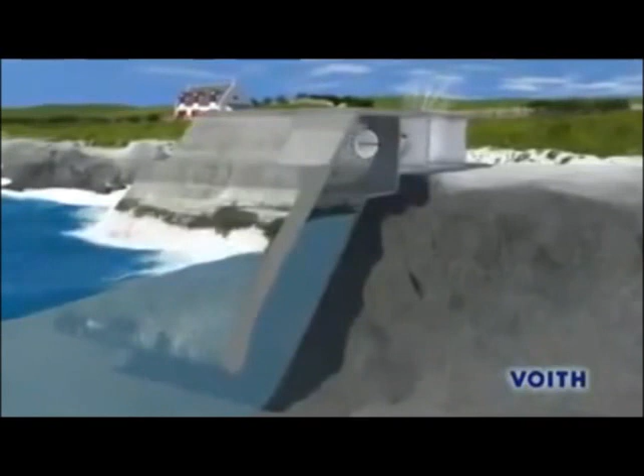The operating principle of this wave power station is as simple as it is ingenious. An enclosed chamber has an opening beneath sea level, which allows water to flow from the sea into the chamber and back. The water level in the chamber rises and falls with the rhythm of the waves, and air is forced forwards and backwards through a turbine connected to an upper opening in the chamber. As it is compressed and decompressed, the airflow has sufficient power to drive the Wells turbine, named after its inventor, which is driven in the same direction by both forward and reverse airflow.

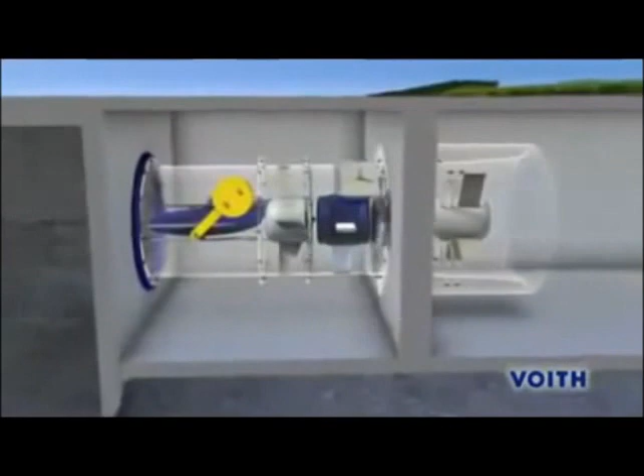Even relatively low wave motions can generate enough airflow to keep the turbine moving and to generate energy. The world's first power station of this kind was put into service as early as November 2000 on the Scottish island of Islay, and has been feeding power to the grid ever since.

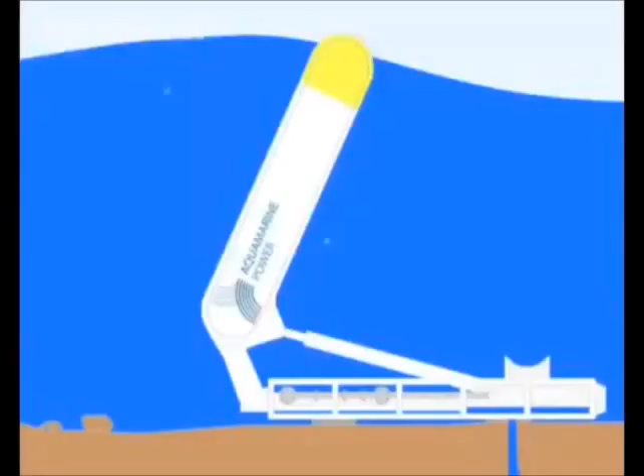Sea creatures are inspiring the latest devices that harness wave power. This one, called the Oyster, sits on the ocean floor and opens and closes as waves pass over it. Cables attach it to generators on the shore. Since November 2009, it's been powering 9,000 homes in the Orkney Islands.

Another device looks like a snake. The Anaconda is made from a rubber tube filled with water that floats just below the surface. When a swell hits the front of it, the tube is squeezed, and a bulge ripples down its length, powering a turbine in its tail. Prototypes are currently being tested, but the full-scale version will be 200 meters long.

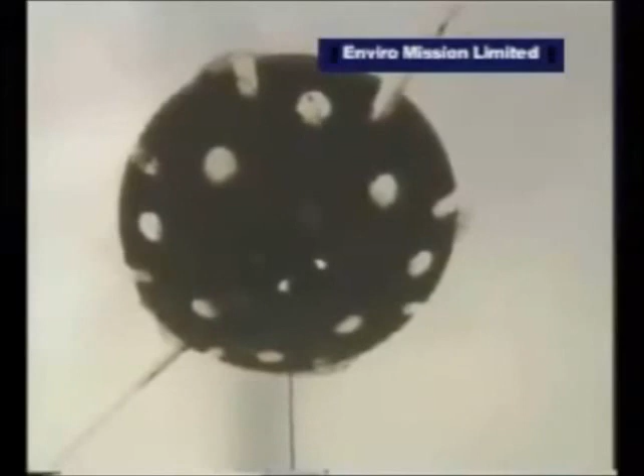Inside of the collector area, you can see 4.4 hectares of plastic material called Tedlar - polyvinyl fluoride - which is held in position by these spreaders, pulled down by this heavy weight. That's to keep everything tight so it can handle the high winds generated, not only by the air flowing through to the chimney, but also in this area generally, where winds can get up to around 150 kilometers an hour.

During the day, the heat builds up here to around 50 degrees centigrade, and the air starts flowing in continually towards the chimney. But the interesting thing is that it also works at night as well as day, and in cloudy and rainy spells, because not only the air but the ground beneath it is heated up during the day to such a degree that at nighttime it re-radiates that heat back again, keeping the air warm and flowing inwards towards the chimney all the time.

Instead of a desert developing underneath this collecting area because of the high temperatures here, they got instead quite luxuriant plant growth underneath because of the greenhouse effect, which produced large quantities of condensation during the night.

This is the funnel, as it's known, and it's not much more really than two curved capes made of a polymer-coated fabric, which gives a smooth transition for the air coming in from the collecting area outside and going up into the chimney above, where you can just see the blades of the turbine turning slowly. Well, it's switched off at the moment because they're making some adjustments.

This solar chimney in Spain has demonstrated that it will be possible in the future to compete on a dollar-for-dollar basis with virtually any other form of power generation, with that one unbeatable advantage: an inexhaustible source of free, original energy in the sun.

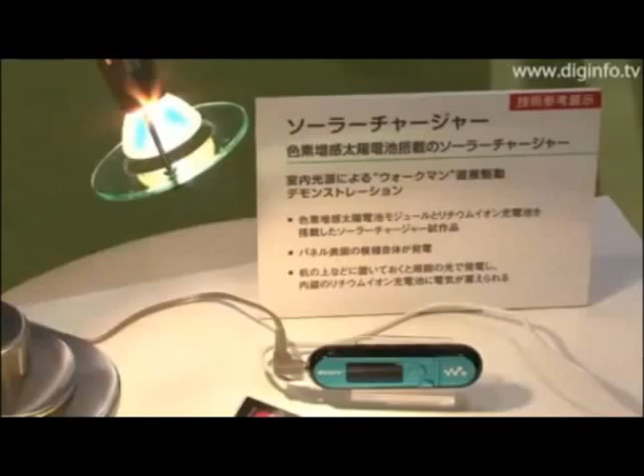As a mobile application, Sony also displayed a solar charger with dye-sensitized solar cells. The pattern on the surface of the panel generates electricity which is stored in a lithium-ion battery. At Eco-Products 2009, Sony used an indoor light source to actually power a Walkman as a demonstration.

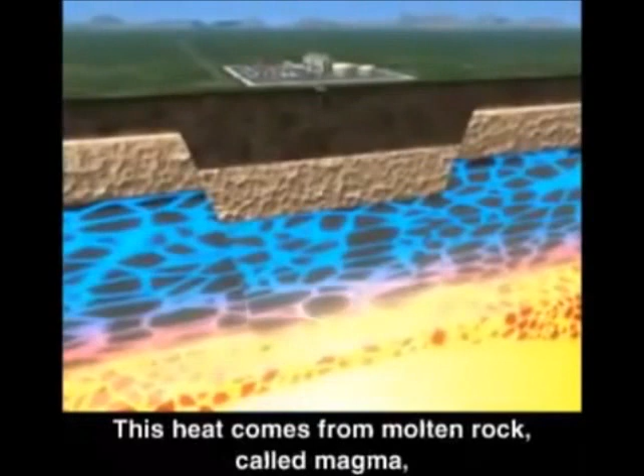The natural heat of the Earth creates geothermal resources. This heat comes from molten rock called magma, located at the Earth's core, deep below the geothermal resource. Over thousands of years, rainwater seeps through cracks in the Earth's surface and collects in underground reservoirs. The magma heats the water until it becomes a superheated fluid.

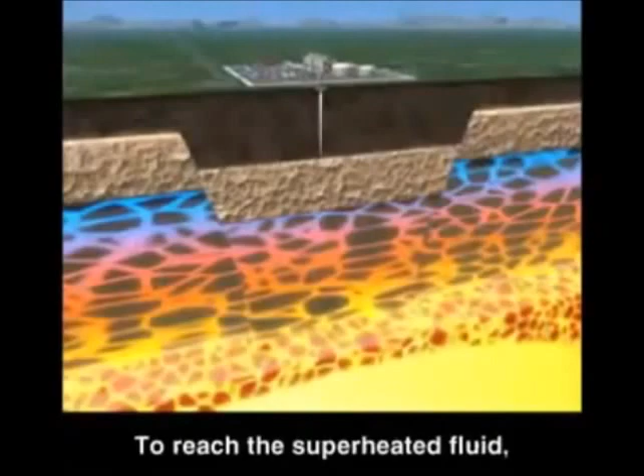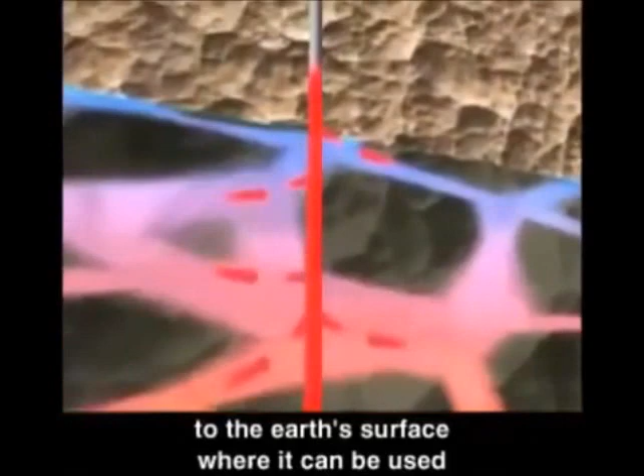To reach the superheated fluid, wells are drilled 5,000 to 10,000 feet below the surface of the Earth. These wells, called production wells, bring the superheated fluid to the Earth's surface, where it can be used to generate electricity for homes and businesses.

Under its own pressure, superheated fluid from the geothermal resource flows naturally to the surface through production wells. As the liquid flows toward the surface, the pressure decreases, causing a small portion of the fluid still within the well to separate or flash into steam.

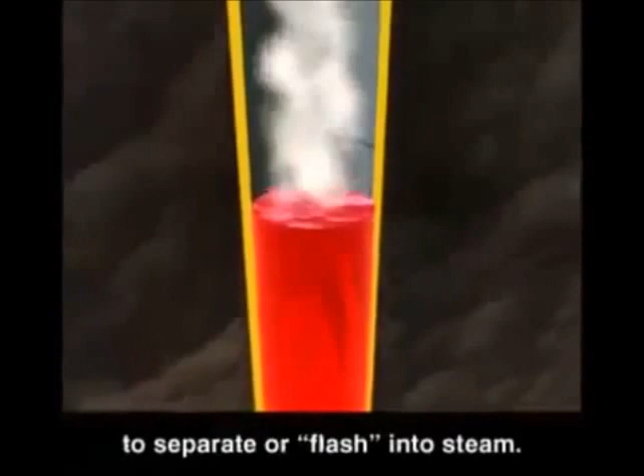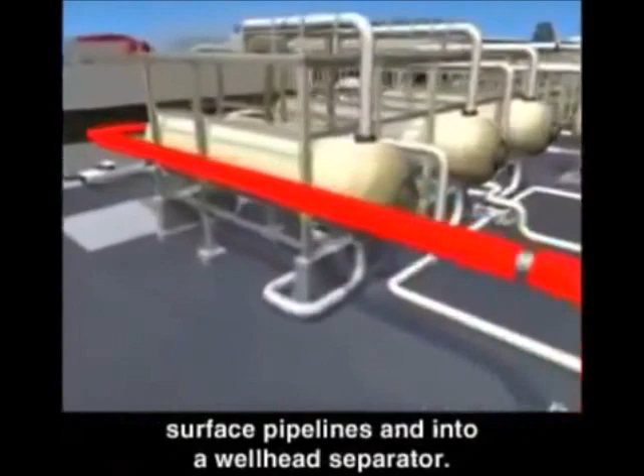At the surface, the superheated fluid and steam mixture flows through surface pipelines and into a wellhead separator. Inside the separator, the pressure of the superheated fluid is reduced. This causes a large amount of the superheated fluid to rapidly vaporize and flash into high-pressure steam.

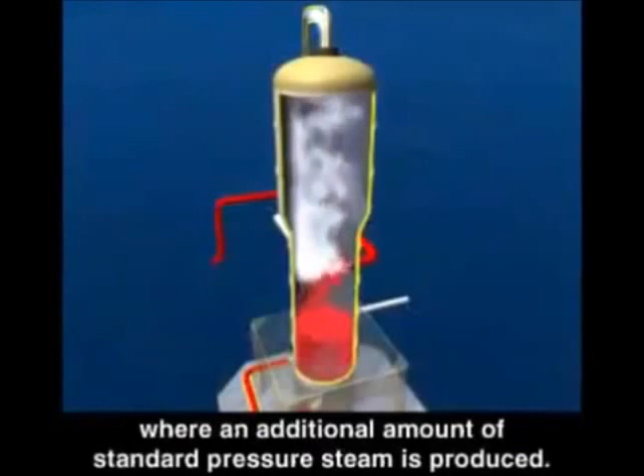The geothermal fluid that is not flashed into steam in the wellhead separator flows to a second vessel called a standard pressure crystallizer, where an additional amount of standard pressure steam is produced.

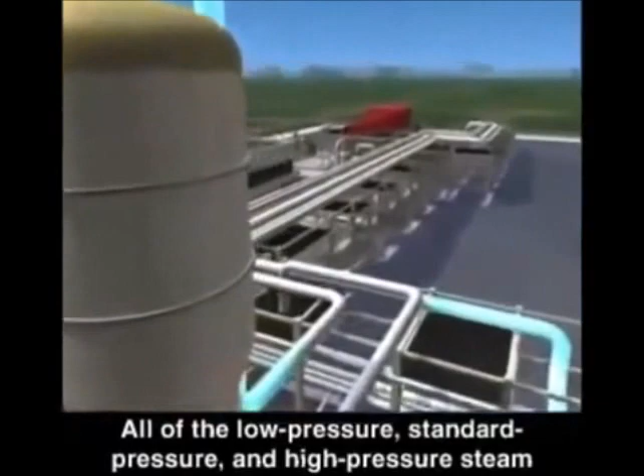The flash process continues in the low-pressure crystallizer. The remaining fluid is again flashed, this time at a lower pressure to produce low-pressure steam. All of the low-pressure, standard pressure, and high-pressure steam is delivered to a turbine.

The fluid that is not flashed into steam flows into the reactor clarifier system and is then returned to the geothermal reservoir through injection wells.

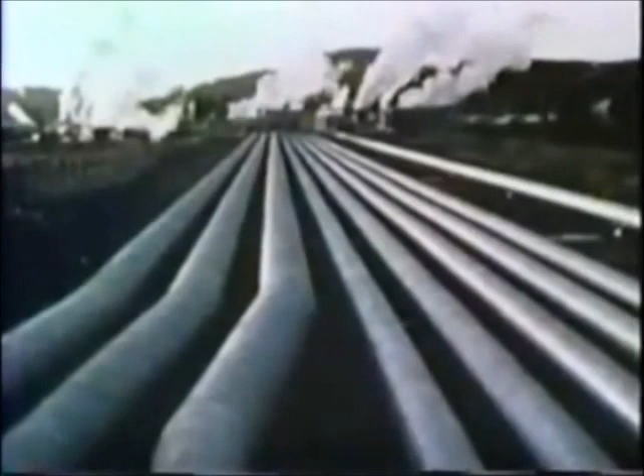Some of this energy has already been harnessed for mankind. The geothermal plant at Wairakei supplies 18% of the electricity needed by New Zealand's North Island.

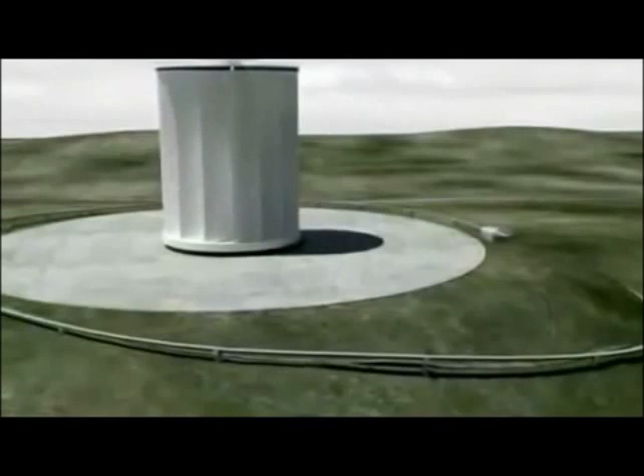Maglev Wind Turbine Technologies Incorporated has now made the quantum leaps in wind power harnessing innovation that will replace wind farms currently requiring tens of thousands of acres. Maglev Wind Turbine Technologies inventor Ed Mazur has created this industry-evolving sail-fin generator, which replaces 1,000 inefficient propeller towers, producing up to 2 gigawatts of renewable power on less than 100 acres with minimal environmental impact.

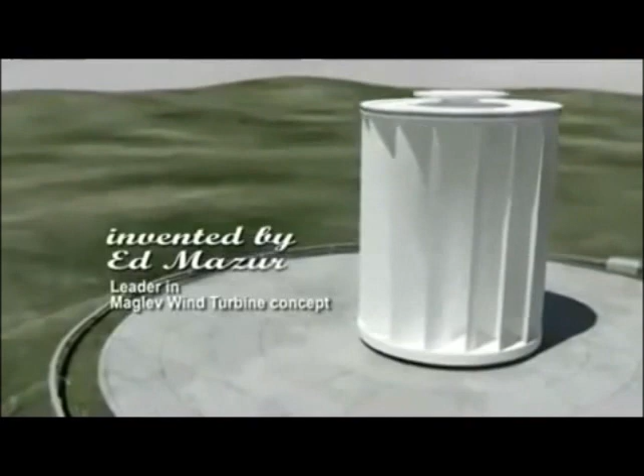This is because Maglev Wind Turbine requires no input power source. It rides on a frictionless rare earth magnet base and frictionless gears, requiring minimal maintenance. With on-site power storage and conversion, Maglev Wind Turbine is grid-ready and self-sufficient.

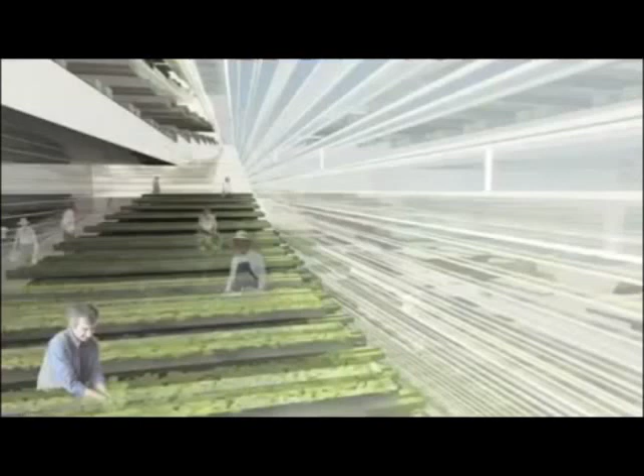The vertical farm concept started in a classroom. Traditional farming, everybody's familiar with it. You plow the land, you plant the seeds, you water and you fertilize and you grow and then you harvest and then you ship. That's normal farming. Now vertical farming does the opposite, except for one thing.

Vertical farms still make your food, but they employ closed-loop agricultural technologies. That means all the water is recycled, all the nutrients are recycled, and the only thing that actually leaves the building is the produce. This is a type of hydroponic growing system, and you have multiple layers of plants to maximise the space for cultivation.

The top trays are going to get the maximum light. The lower trays, particularly the bottom ones, are very shaded. But by it moving, that opens up the trays to different angles of sunlight.

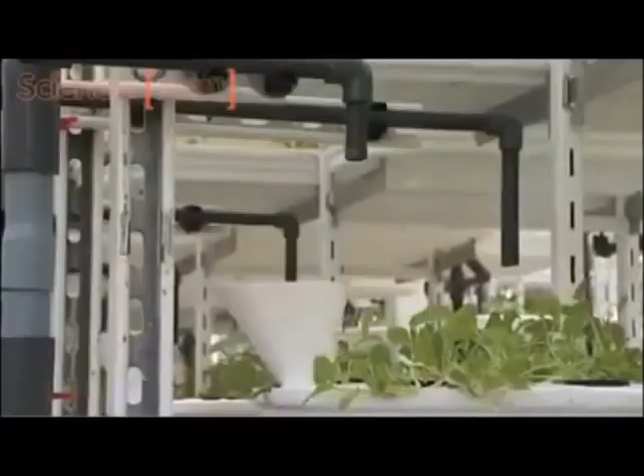This system's great to have in the zoo because we're growing the crops here. They go straight out the same day to the animals. They're not refrigerated at all, so they have all those sugars really intense and really sweet.

The plants are growing in a bath of water. This water is changed each time the crop's watered, which allows fresh nutrients and oxygenated water to go in.

Hydroponics is a great system for growing crops because it optimises the food and water that the plant gets, which maximises the speed that the crop can grow and maximises the nutrients that are going to be contained within that crop.

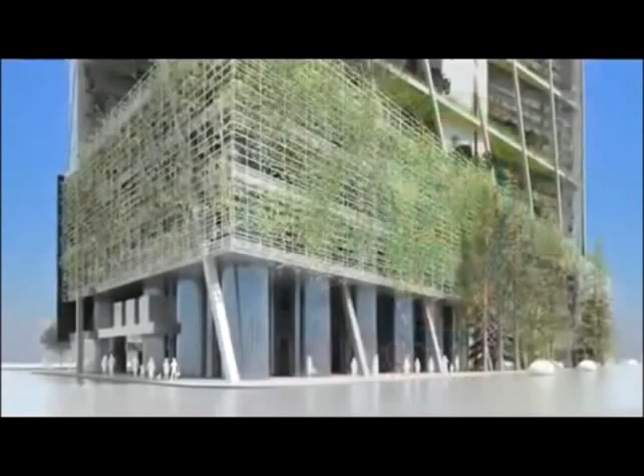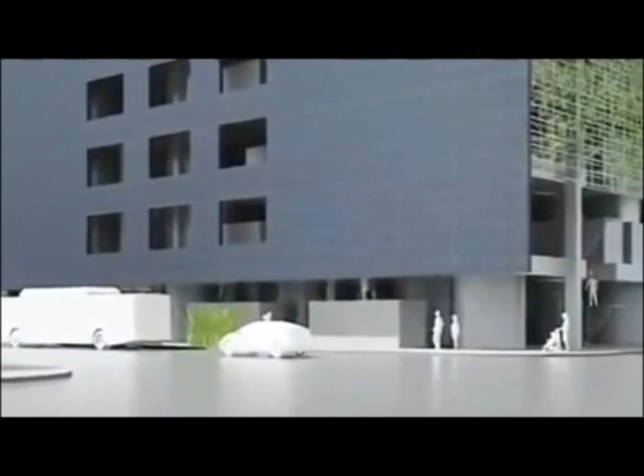There's some real opportunities to connect people to the systems that sustain us in a new urban environment. So we can actually see the water tanks, we might even be walking between them at street level. We would be adjacent to the photovoltaic panels collecting solar power, and walking past the restaurant serving food from the roofs above. There's a lot of opportunities to connect people with these food systems and ecological systems that are part of the new city topology.

We imagined a new place in town, a place where healthy food is produced, where research to guarantee food security is carried out, where you may learn and taste, a place designed to host quality for your well-being without pollution or waste, a place just around the corner. The biggest social benefit is that everybody gets fed healthy, clean food, and we can use it to remediate water so you can have safe water and safe food wherever you live.

I've had no negative reaction to this idea whatsoever. I have a very positive reaction to it, and I think the idea is about to develop into reality.

The RepRap project is a project to make a three-dimensional printer, that is to say a device that you plug into the USB port of your computer and it prints out solid three-dimensional objects. It's to make that device both open source and self-replicating. So it's a 3D printer that can print out a significant fraction of its own parts, though not all of them. And it's open source, so if you've got a RepRap printer, you just download the design off the web for free and you can print another copy of it and give that to your friend.

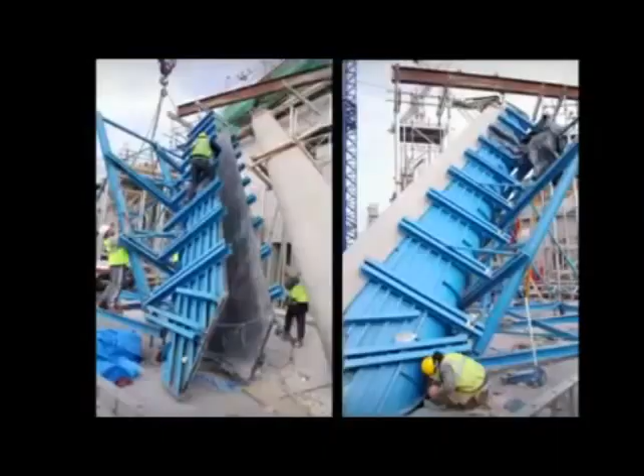The introduction of highly sophisticated computer modeling technologies has meant that designing the shape and form of a building is now only limited by an architect's imagination. Leading architectural practices such as Foster & Partners are designing buildings to a level of geometrical complexity unheard of 10 years ago. However, while these forms can often be achieved through off-site factory-based manufacturing techniques, there are significant limits to the levels of intricacy attainable. For example, pouring concrete into a formwork can go some way to fulfilling these ambitions, but the reality is that the achievable complexity is still limited.

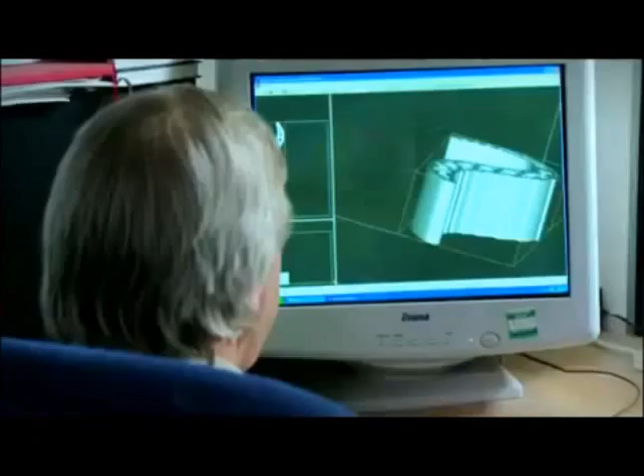The manufacturing processes required to turn these complex building designs into reality have remained elusive until now. This may be about to change if current research by scientists at Loughborough University comes to fruition. The research group has been inspired by 3D printing, an additive manufacturing process. Here, information created from computer-generated models is exported to a machine which then builds up a model or a component, layer by layer. The virtual model is, in effect, materialized.

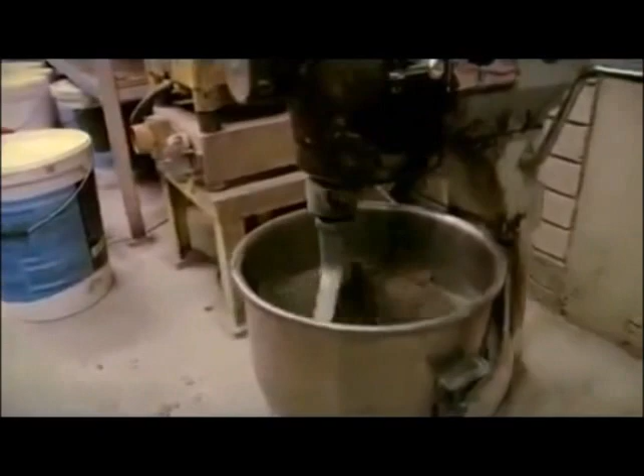At Loughborough, instead of using powder and glue, they are experimenting with concrete to create large-scale building components. The research here at Loughborough University gives us tremendous opportunities. We are able to have a little peek into the future to see what construction technology will be in the next 5 or 10 years.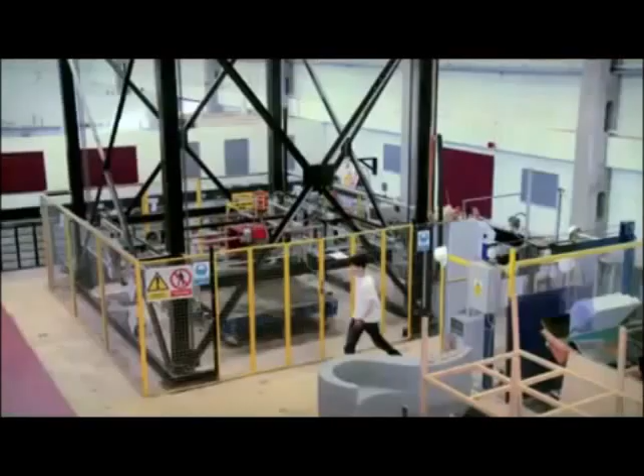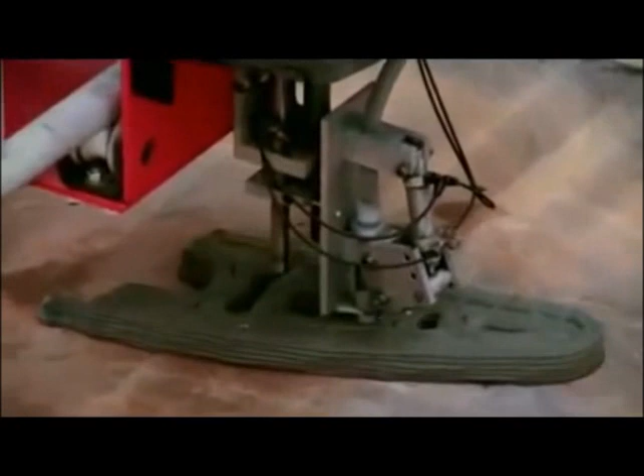Concrete printing works on the basis of a highly controlled extrusion of cement-based mortar, which is precisely positioned according to computer data. The process has the potential to create architecture that is more unique in form, but crucially, components do not have to be made from solid material, and so can use resources more efficiently than traditional techniques. We have shown how additive manufacturing can be developed to create large structures such as panels and walls, with precisely controlled voids within them. For example, the section being manufactured here could incorporate all the service requirements of a building, such as pipes and cables, in one unit.

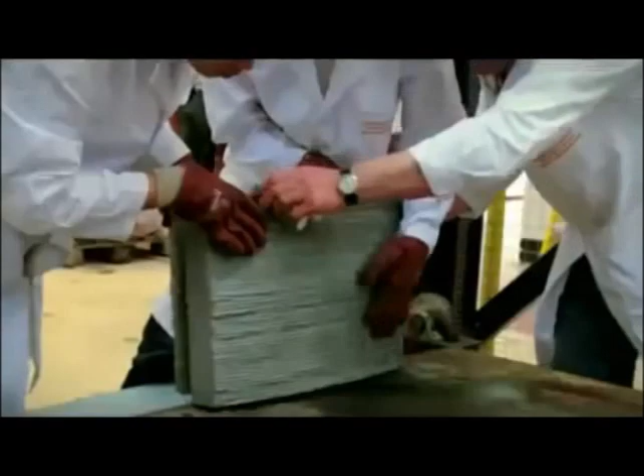This process is capable of producing building components with a degree of customization that's not yet been seen. It could create an era of architecture that's adapted to the environment and fully integrated with engineering function. Imagine whole sections of a building being printed and then assembled on site with their service provision already installed.

The Ultra PRT, short for Personal Rapid Transit, is basically a taxi crossed with a metro with none of the disadvantages. I just thought transport was not done well, and I believe that if we thought about transport in a proper way, we would come up with a better way of doing it. This is the result of that process.

Adam Ruddle, the PRT's lead engineer, explains how it works: the passenger comes to the station, buys his ticket, and when he gets to the vehicle, he selects the journey he wants and gets in. The vehicle is then told by a central computer where it's going, and it completely autonomously drives you from your start to your end station without stopping anywhere in between.

The vehicles that are going to a station will drive away from the main guideway into the station area. That means everybody who isn't going to that station carries on along the main guideway at full speed. That way, you travel very quickly from start to end of your journey and are not delayed by anybody else's travel whatsoever.

It's quick, it's safe, it's easy to use, and it's pretty cool to look at. The Ultra PRT may just be the answer to India's heavily congested and potholed streets, and given how little it costs to build and how quickly it can be built, it may soon be headed to a neighborhood near you.

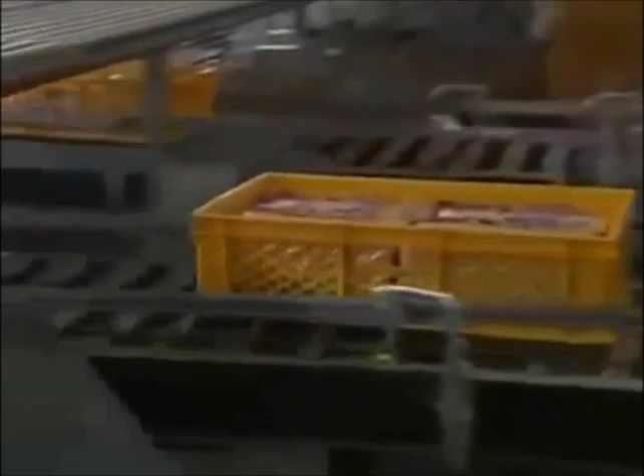Replacement of human labor with machines. At the core of the economic system itself is the mechanism of labor for income. Our entire economic system is based on human beings selling their labor as a commodity in the open market. If humans do not have the option to work for a living, then the monetary system as we know it is over. No one can buy goods if they don't earn money. Companies cannot afford to produce if the consumer has no purchasing power to buy anything.

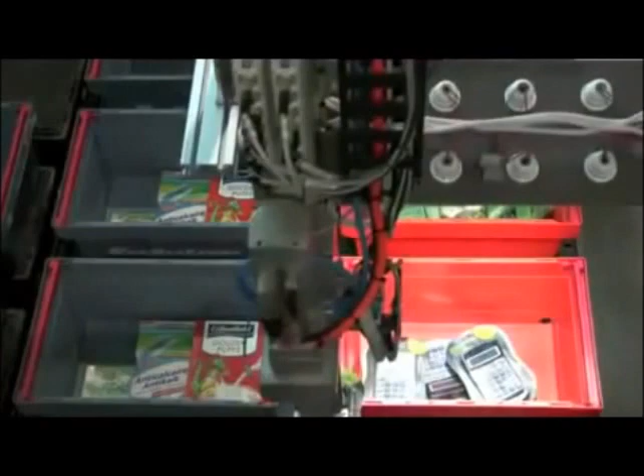As John Maynard Keynes disdainfully pointed out, we are being afflicted by a new disease, of which some readers may not yet have heard the name, but of which they will hear a great deal in the years to come, namely technological unemployment. This means unemployment due to our discovery of means of economizing the use of labor outrunning the pace at which we find new uses for labor.

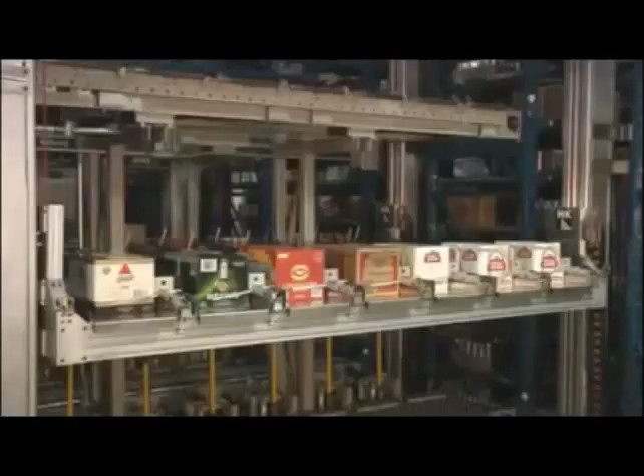While politicians, business leaders, and labor leaders bicker over issues they claim are responsible for the growing unemployment in the world, such as foreign company outsourcing or immigrant labor, the real cause is going unaddressed in the public debate, and that is technological unemployment. Since market capitalism is built upon the logic of reducing input costs to increase profits, the inclination to replace human labor whenever possible by machine automation is a natural progression of industry. After all, a machine doesn't need to take breaks, it doesn't require health insurance or benefits, and it isn't part of a demanding labor union.

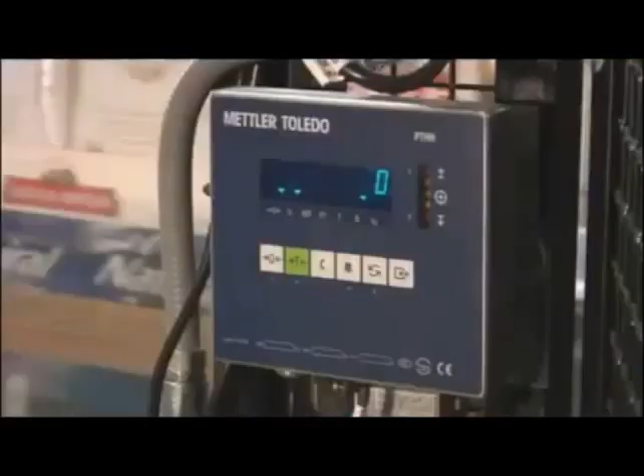A simple glance at U.S. historical labor statistics by sector shows the pattern of machine automation replacing human labor definitively. In the agricultural sector, almost all traditional workflow is now done by machine. For example, in 1949, machines did 6% of the cotton picking in the South. By 1972, 100% of the cotton picking was done by machines. In 1860, 60% of America worked in agriculture, while today it is less than 3%.

When automation hit the U.S. manufacturing sector in the 1950s, 1.6 million blue-collar jobs were lost in 9 years. In 1950, 33% of all U.S. workers worked in manufacturing, while by 2002 there was only 10%. The U.S. steel industry from 1982 to 2002 increased production from 75 million tons to 120 million tons, while the steel workers employed went from 289,000 to only 74,000.

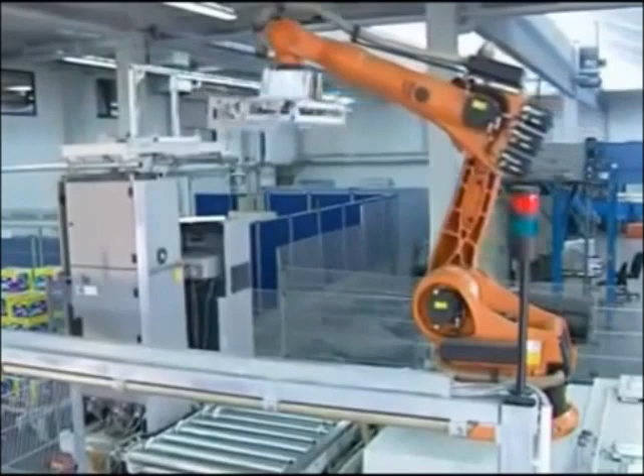In 2003, a study was done of the world's largest 20 economies, ranging from 1995 to 2002, finding that 31 million manufacturing jobs were lost, while production actually rose by 30%. This pattern of increasing productivity and profit, coupled with decreasing employment, is a new and powerful phenomenon, with no changes in sight. So this might beg the question, where have all those jobs gone?

The service sector. From 1950 to 2002, the percentage of Americans employed in the service industries went from 59% to 82%. For the last 50 years, the service sector has been absorbing the job losses from agriculture and manufacturing. Unfortunately, this pattern is slowing fast as computerized automation takes hold there as well.

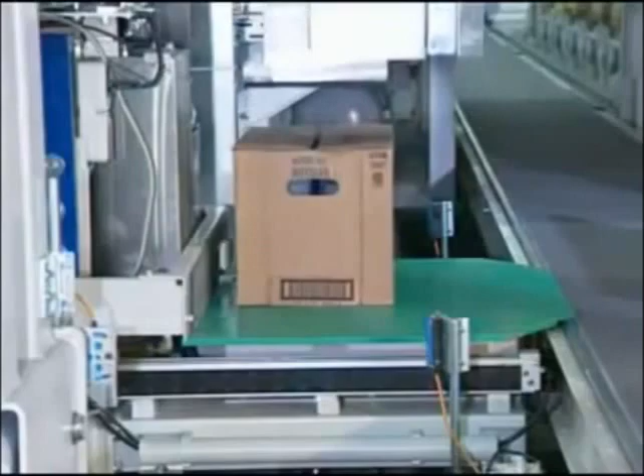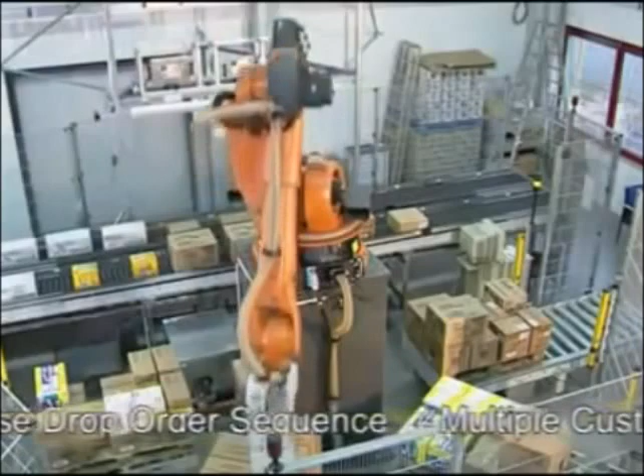From 1983 to 1993, banks cut 37% of their human tellers, and by the year 2000, 90% of all bank customers used teller machines, or ATMs. Business phone operators have almost all been replaced by computerized voice answering systems. Post office tellers are being replaced by self-service machines, while cashiers are being replaced by computerized kiosks. There isn't one area of the service industry that isn't being affected by computerized automation.

Economist Stephen Roach has warned the service sector has lost its role as America's unbridled engine of job creation. Given this reality, where is the emerging new sector to employ all of the newly displaced workers? There isn't one. And while economists struggle to create models to deal with the issue of nearly unstoppable unemployment, most refuse to consider what is really needed in order to prevent a total breakdown of society.

The solution lies not in attempting to fix the issues that have emerged, but rather it is time we transcend the system in its entirety. For the system of monetary exchange, along with capitalism itself, is now completely obsolete in the wake of technological creativity.

If people do not have jobs, they cannot support the economy by purchasing anything. This reality is the final proof that our current system is now completely out of date, and if we want to deter riots in the streets and poverty on a scale never before seen, we are going to have to revise our traditionalized notions about how society functions at the fundamental level. We require a new social system that is updated to present-day knowledge and modern methods.

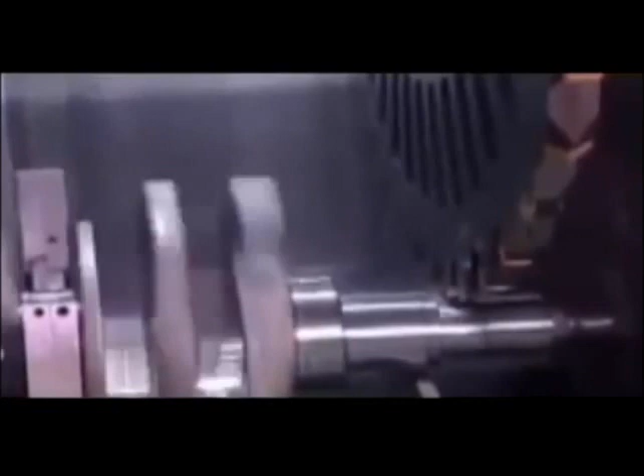Human labor is not only currently being replaced by machines because it is more cost-effective in the profit system, machine labor is actually much better than human labor, and output statistics have shown this continually. This, of course, should be of no surprise. For a machine does not get tired, and it is always more accurate and consistent than a human mechanically.

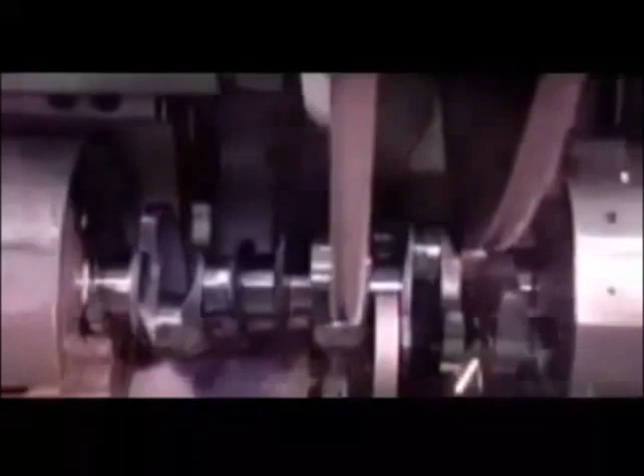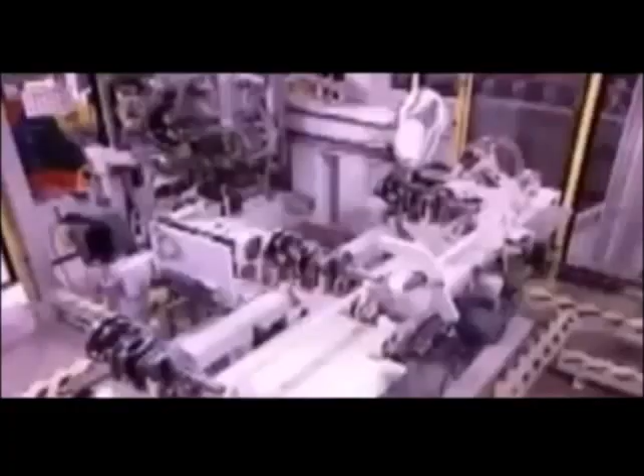Now, one of the more confusing and difficult components for many to consider has to do with the deliberate focus of using machines to replace human labor whenever possible. The question is always, who will maintain the machines? Machinery today is now being combined with computerization. Essentially, a computer is the brain of the machine, and it instructs the machine what to do. This combination of machine and computer intelligence could be termed cybernation.

Cybernated machines today are probably the most powerful and influential invention humanity has ever created. The possibilities of these tools are on pace to changing the entire fabric of society, beginning first with the freeing of the human labor force. In the words of Albert Einstein, ultimate automation will make our modern industry as primitive and outdated as the Stone Age man looks to us today.

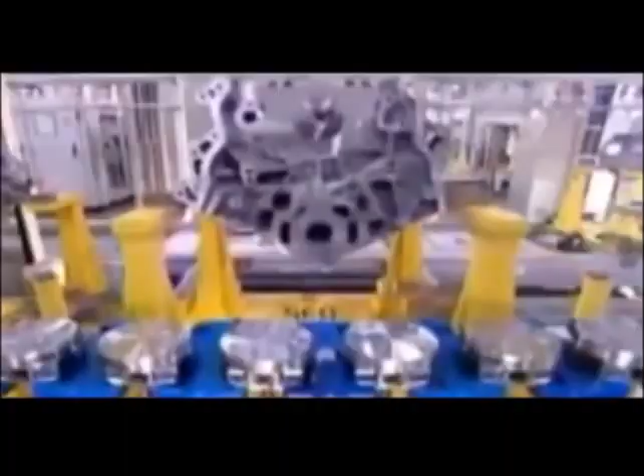This reality is not something we should fight. We should embrace it emphatically. Cybernation is the emancipation proclamation for humankind, freeing us from the drudgery of common labor, opening new horizons for human creativity and exploration. These cybernated machines far exceed the physical accuracy and endurance of the human body, while also being able to compute at incredible rates, also far exceeding the computational speed and capacity of the human brain.

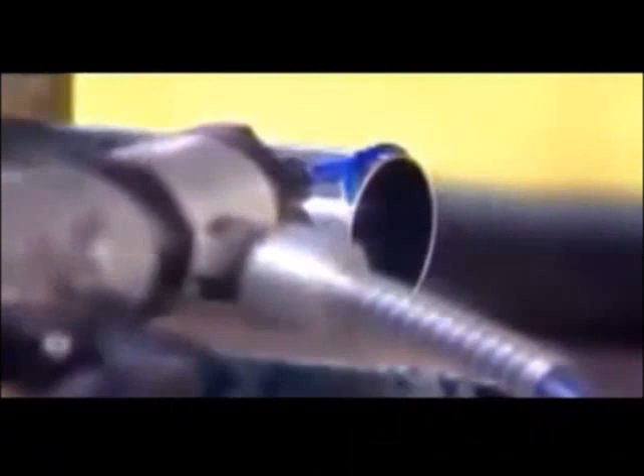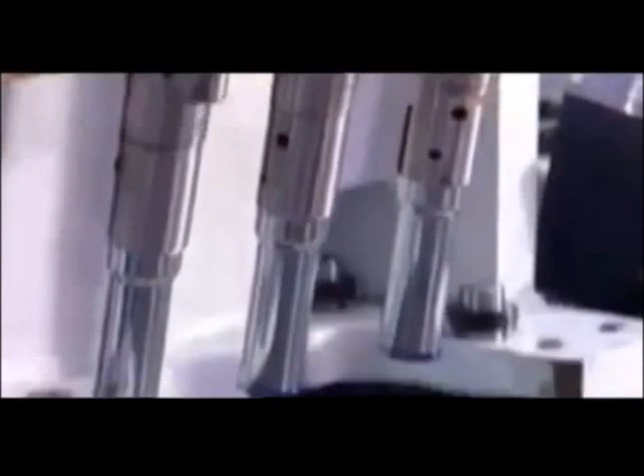As far as application, the first step is to ensure that the cybernated machines we devise are of the highest quality components and programming. In order to do this, we would have to outgrow the monetary system, for it perpetuates inferior products for the sake of cyclical consumption. There is no reason why everything in your home, from your refrigerator to your stove to your television to your computer, could not last your lifetime without physical repair.

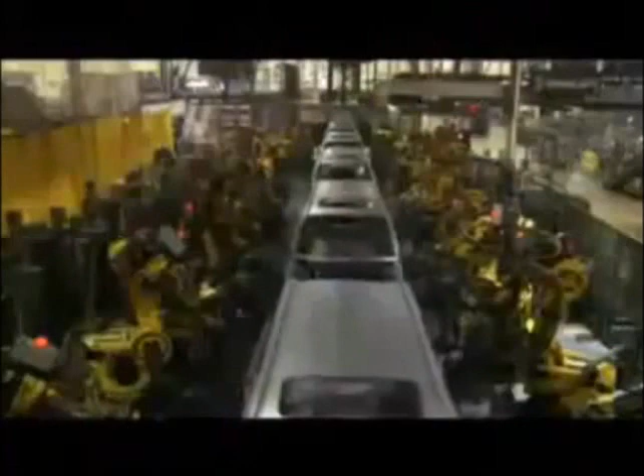How can that be said with confidence? Because the best materials available on this planet, such as titanium, have sustainable properties that far exceed the life of a person by thousands of years. The cybernated machines would not be bought and sold, they would be built and designed to last. Not only will they have extreme durability and long lifespans, these advanced machines will eventually be able to repair themselves.

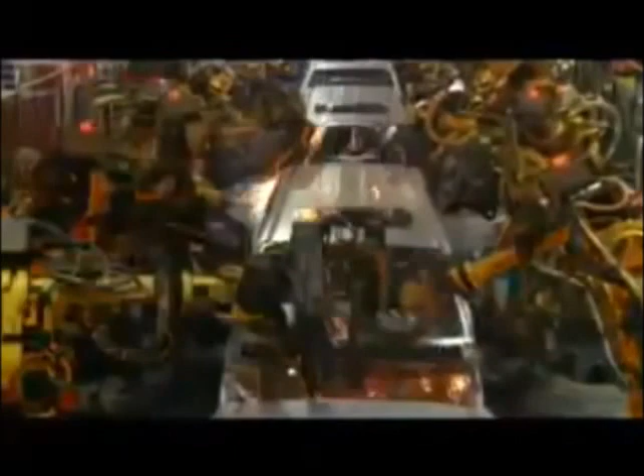In cars today, there are often warning lights on the dashboard that will alert you to a problem with a particular part of the car. This idea can be expanded in all machinery to the degree where not only is the machine's onboard computer aware of a problem, supplemental machines can thereby be directed to replace the broken part in real time.

As fanciful as it may seem, self-repairing machines, structures, and even circuits are growing realities. The problem is that the production of such efficiency is not rewarded in the monetary system, so most people in society have no idea what is actually possible.

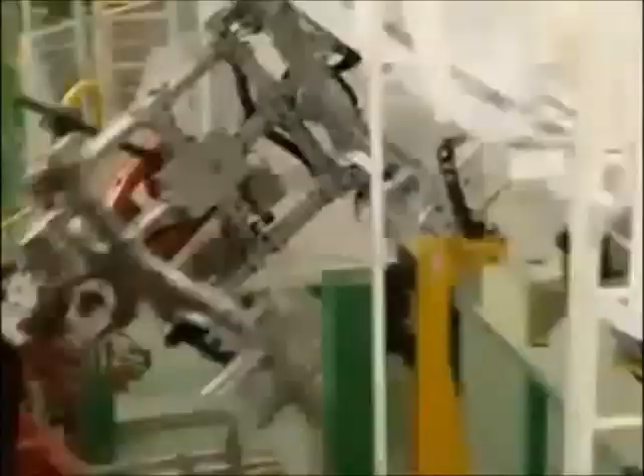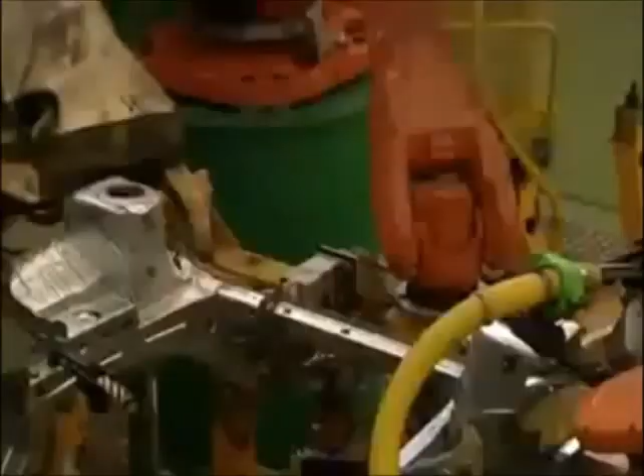Furthermore, the role humans will play within this automated system will be that of supervisors, and nothing more. Once a fully integrated, autonomous, cybernated industrial system is set up, it is simply a matter of updating the system and making sure the system is in order. As time moves forward, we can only expect that the rate of our technological capabilities will continue to increase, perfecting this system.

Now, while most people today recognize society's use of machine automation in manufacturing and the like, many have a very difficult time seeing how automation can be applied to complex jobs, such as doctors, architects, and the like.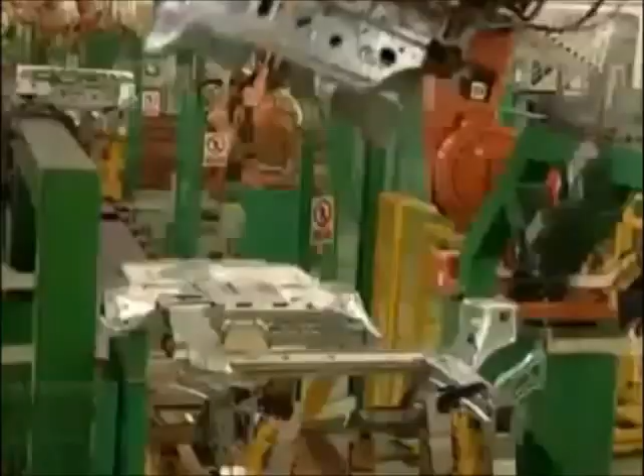In order to consider this, we first have to ask ourselves what the true nature of our occupational roles really are. What exactly is a doctor, a carpenter, a plumber, or an architect? What are they actually doing? They recognize and react to observed patterns.

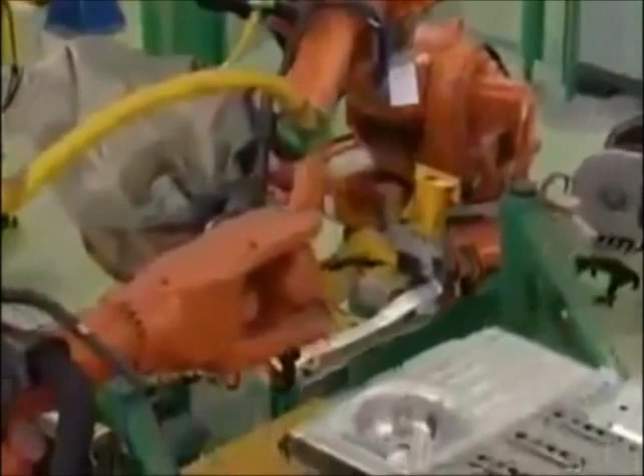When a doctor examines you, all he or she is doing is mentally referencing what has been learned. If you go to a dermatologist because you think you might have cancer on your arm, the doctor is going to examine the skin and mentally reference the patterns he or she has been taught. Then they might take a sample of the skin to be tested by machine analysis. It is a technical process.

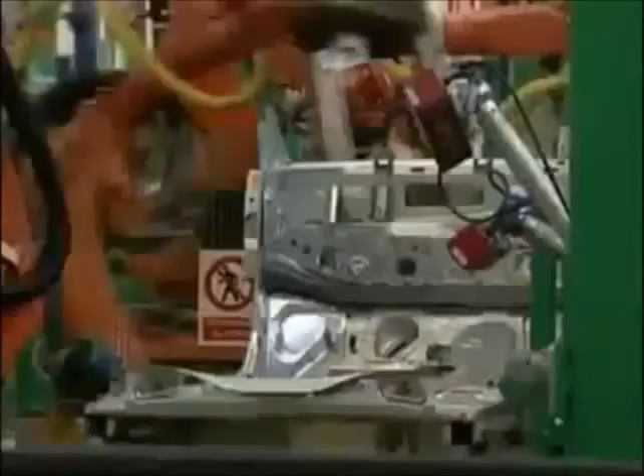There is no reason why, say, an optical scanner connected to a computer database could not be invented which could scan your arm and immediately understand what problem exists. Even surgery, as sensitive as it may seem, is a purely technical process. It is simply a matter of time before extremely advanced machines replace surgeons. The same goes for every other utilitarian occupation in existence.

And this brings us to a very critical realization, one that will have a profound effect on our progress on this planet. The conscious delegation of decision-making to computers is the next phase of social evolution.

Human nature is defined as the shared psychological attributes of humankind that are assumed to be shared by all human beings. Therefore, the implication of the term is that certain psychological, hence mental behaviors are in some way hardwired into a person. We are thus supposedly born with some preset psychological inclinations.

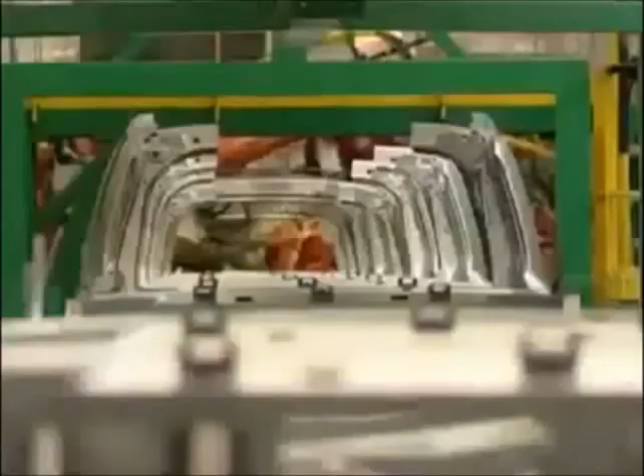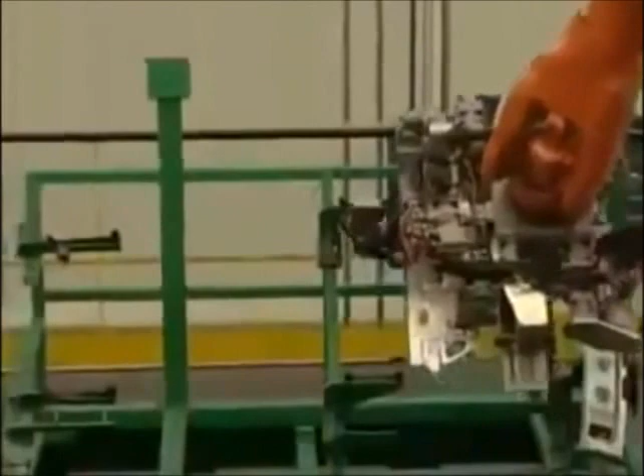It is easy to see how this kind of assumption has manifested. For if you look at the historical record for the human species thus far, we see an endless series of wars, genocides, conquests, and power abuses. Given that this is the pattern we recognize, it is easy to assume that it must be some set human nature to behave in ways that are historically recurring.

Furthermore, so-called criminal behavior has been a focus of psychologists for some time. Is it the responsibility of an individual's genetic makeup that makes them a so-called criminal? Or is it the environment in which they are raised that determines this? This is the age-old question of nature versus nurture.

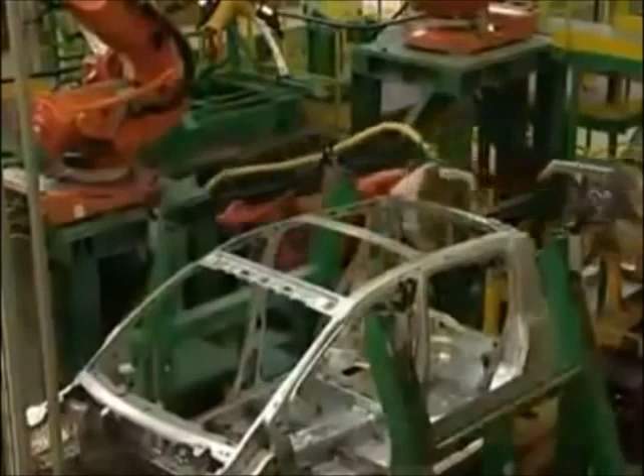First, what exactly is criminal behavior? How do we qualify behavioral distinctions that have been invented by man and change with time? The entire concept of criminality is temporal and relative to a culture's values and concepts of morality. Only 600 years ago, certain indigenous cultures around Mexico engaged in mass human sacrifice, often killing thousands at a time. Was this criminal activity? To us, perhaps, but to them it was accepted social custom.

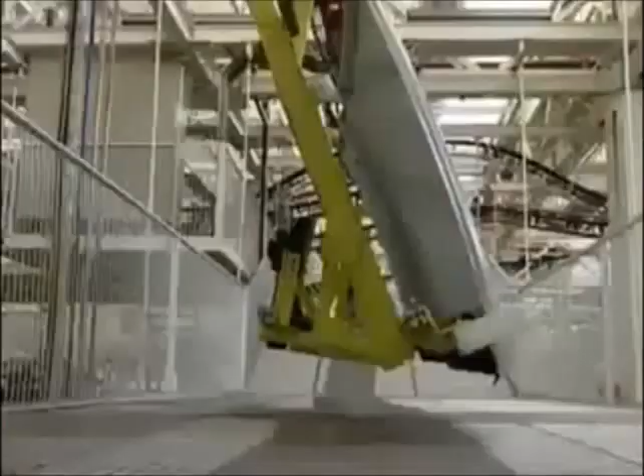What about the generations and generations of accepted slavery? Is a criminal someone who steals food in order to feed his or her starving family? The bottom line is that there is no concrete scientific evidence that really supports the notion that any of our behaviors are strictly the result of our genetics.

The notion of human nature is largely mythological. It stems from primitive religious dualities that the human is good or evil inherently. The pursuit of people who seek the gene or the like, which is supposedly the cause of a particular behavior, is essentially a form of superstition. It is like a person being possessed by demons, which control their actions.

The fact is, while neurochemicals and physiological traits set propensities for a person's reactions and social gravitation, it is the environment that really creates our values and behavior. We must realize that we are on our own on this planet, and it is up to us to change the world for the better.

It is time we stop pontificating and providing lip service to those spiritual values which religious and secular philosophers have been discussing for millennia, and finally put them into practice. Science is the tool for this functional spirituality, and if we work to apply its methods for the betterment of civilization itself, we can reach the spiritual goals we have sought since antiquity.